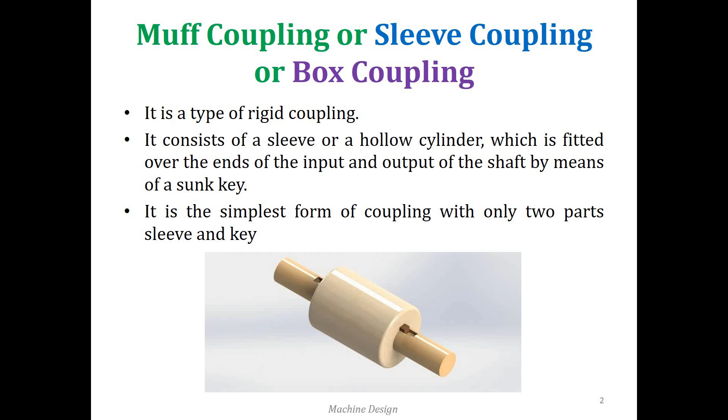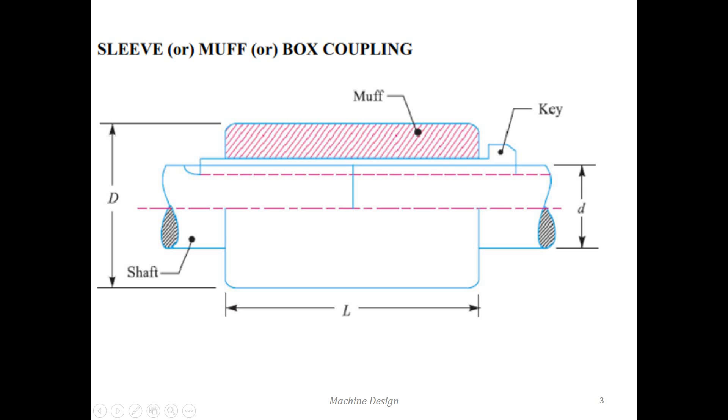Why? Because it has only two parts, the sleeve and the key, and you can also count the shaft. Only three parts are here. This is a schematic diagram of muff coupling. It has only three parts, as I told earlier: the muff, the key, and the shaft. Here the diameter of the shaft is noted as lowercase d, the diameter of the sleeve is uppercase D, and the length of the sleeve L is noted here. These are some of the parameters we have to consider.

This is the design procedure for muff coupling. Generally it has four steps. The first one is design for shaft. We have to calculate the shaft diameter here. For that, the formula is Mt = π/16 × τs × d³. Mt is the twisting moment, or we can call it torque. For that, the formula is P × 60 × 1000 / 2πN, in N·mm. That is the unit for torque.

The second step is dimensions of muff coupling. Here we have to find two things. One is the outer diameter of the sleeve, capital D. For that, the formula is D = 2d + 13. The second is the length of the sleeve, L = 3.5d. These two things we have to calculate in the second step.

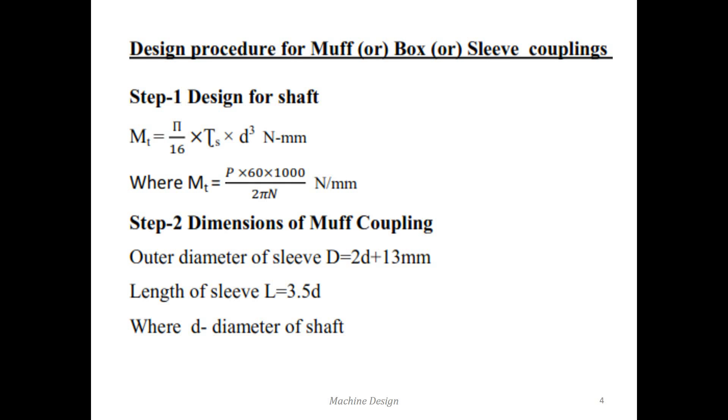The third step is design for sleeve. The formula for sleeve design is Mt = π/16 × τ × (D⁴ − d⁴)/D. Why? Because the sleeve is hollow, so we have to consider the outer diameter and inner diameter. The outer diameter is noted as uppercase D, and the inner diameter as lowercase d. So this is the formula for the sleeve.

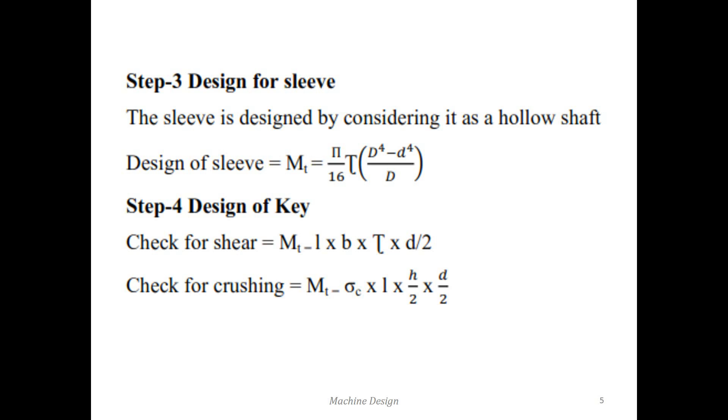The last one is design for key. Here we have to consider two things: shear failure and crushing failure. For shear failure, the formula is Mt = l × b × τ × d/2, where τ is the shear stress. For crushing failure, Mt = σc × l × h/2 × d/2, where σc is the crushing stress. So this is the fourth step we have to follow for designing the muff coupling.

So this is an example problem for muff coupling. Just read out the question. Design and make a neat dimensioned sketch of a muff coupling which is used to connect two steel shafts transmitting 40 kW at 350 rpm. Power is given as 40 kW, and speed is given as 350 rpm. The material for the shaft and key is plain carbon steel, for which allowable shear and crushing stresses may be taken as 40 MPa and 80 MPa respectively.

That means shear stress we take as 40 MPa. When you convert MPa into N/mm², it's the same value: 40 MPa equals 40 N/mm². For crushing stress, σc equals 80 MPa, so 80 N/mm². Lastly, the material for the muff is cast iron, for which the allowable shear stress may be assumed as 15 MPa. So τc equals 15 MPa, or 15 N/mm².

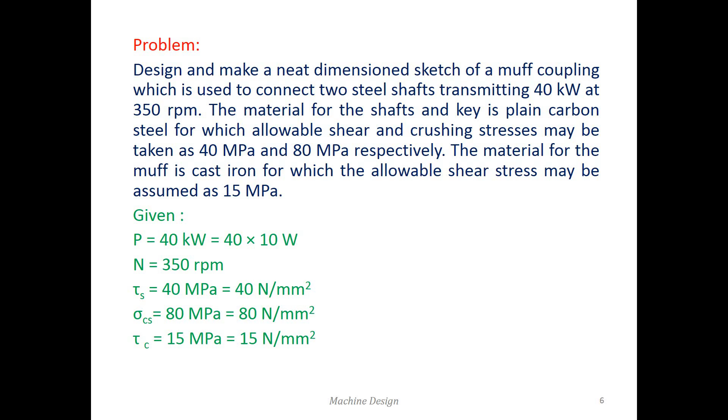Now we'll solve the problem. First, we have to design the shaft. In this step, we have to find the diameter of the shaft.

So only after finding the diameter of the shaft can we go for the design for sleeve and design for key. So first, we know the formula for finding the diameter of the shaft is twisting moment, or torque, equal to pi by 16 into tau into d cube.

Before going to that formula, we need to know the torque value. The formula for torque, Mt or T, equals P into 60 divided by 2 pi N. We'll get the answer in Newton meter. Once you convert that Newton meter to Newton millimeter, into 1000, we finally get the torque value. After finding the torque value, just substitute in the formula.

That is 1100 into 10 to the power of 3 equal to pi by 16 into tau s into d cube. The tau s value is given in the question itself; just substitute that value, that is 40 here. Then solve the equation and you will get the diameter of the shaft, 52, we can say 55 mm. So 55 mm is the shaft diameter for this question.

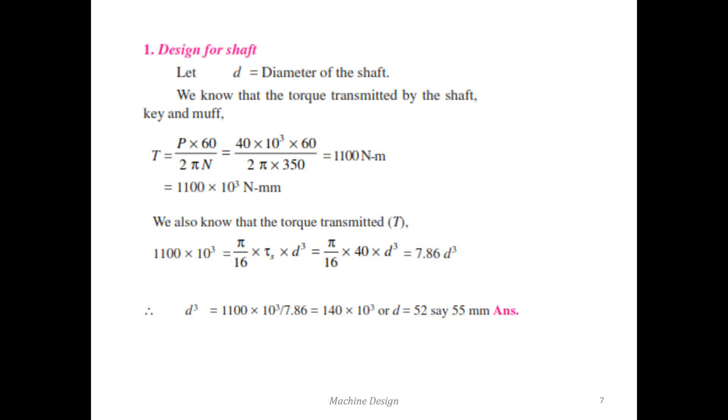Second step, design for sleeve. Before that, we need to find two dimensions of the sleeve: the outer diameter and the length of the muff, or sleeve. The formula is capital D equal to 2d plus 13. The diameter value is known from the previous step, so just substitute and we get the diameter value 125 mm.

Second, length of the sleeve, capital L equal to 3.5 d. Substitute the d value and we get the length 195 mm. After that, substitute in the design for sleeve formula: T equal to pi by 16 into tau c into (D power 4 minus d power 4) divided by D. The torque value is known, capital D is known and small d is also known.

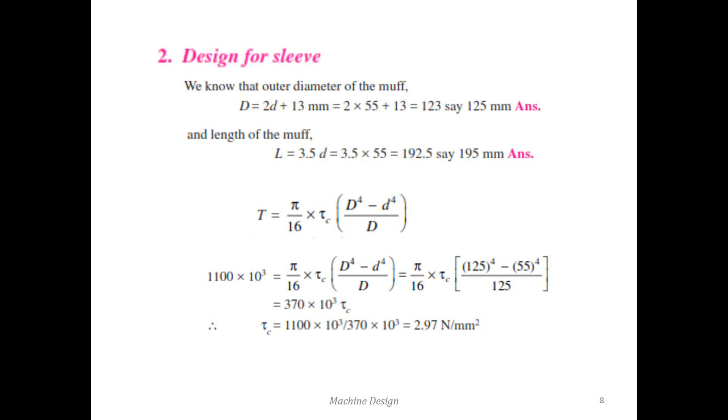The unknown is tau c, which we have to calculate here. We find 2.97 Newton per mm square, the stress for the sleeve. Then compare it with the value given in the question, 15 Newton per mm square. Our value, 2.97, is less than 15 Newton per mm square, so the design is safe.

Second step is over. In the last step, design for key. For the shaft diameter of 55 mm, we take the width and thickness: width will be 18 mm and thickness also 18 mm. The length of the key is half of the sleeve length, so it will be 97.5 mm, around 100 mm.

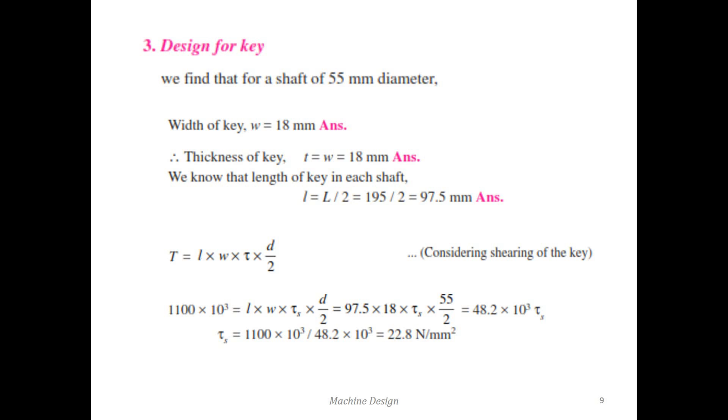Substitute all those values in the shearing failure formula: torque equal to l into w into tau into d divided by 2. The torque value is known, length is L by 2, that is 97.5, w is taken as 18, tau we have to find, and diameter is known. Finally we calculate tau as 22.8 Newton per mm square. That is the shearing failure.

The last thing is to calculate the crushing failure. The formula is torque equal to l into t divided by 2 into sigma c into d divided by 2. The torque value we already calculated in the first step: 1100 into 10 to the power of 3 equal to l into t by 2 into sigma c into d by 2. Here l is 97.5, thickness is 18, and we have to calculate sigma c, the crushing stress.

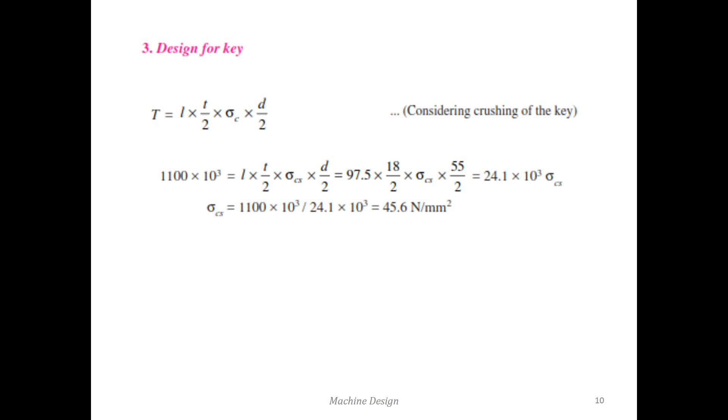The final value of crushing stress is 45.6 Newton per mm square, which will be less than the given value. Here 45.6 Newton per mm square is less than the given value, so the design is safe. So that's it for the design for muff coupling.